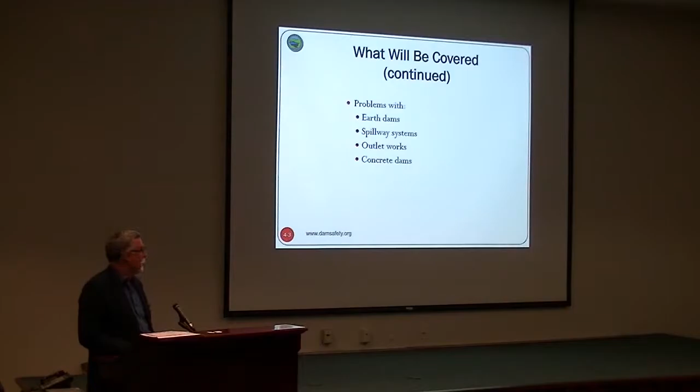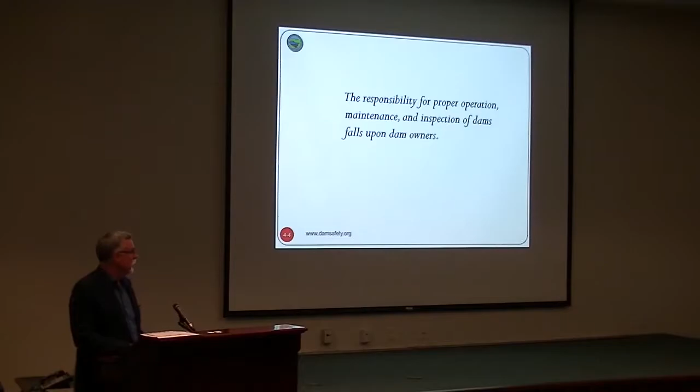Cannot overemphasize whose responsibility it is - you as a dam owner. There's a lot of assistance people can provide, a lot of people can answer your questions, but it's your dam, it's your liability and responsibility. Keep that in mind, because if the dam were to fail, you may not ever get it back, so your homes and property values are going to drop. It's important to try to keep a good, safe operating dam at all times.

O&M is just like taking care of your house. If you don't repair a leaky roof, it's going to do more damage, and the dam is no different. If there's a problem with it, nip it in the bud, try to correct it as soon as you can - whether it's just repainting something or having to come out and fix some small concrete repair. Even though they appear to be very minor, they will get more expensive with time if you don't address them.

Let's talk about dam operation itself, specifically record keeping. If you have instruments and toe drain outlets, if you measure a depth, you want to record what your lake level was that day. If there's been heavy rain, indicate that too - say it rained 3 inches over the last 3 days. Measure your toe drains, and if there's more than one, label them and record the flow rate. All you have to do is take a stopwatch and a graduated bucket. Usually these drains will be small gallons-per-minute flows. A lot of the time we measure them twice and take an average, then record them and keep a log to track all the readings.

Your emergency action plan, once developed, is a living document because people's names and phone numbers change. So at least every year, make sure the contact information is current, and if it's not, update it. When you update it, make sure you send the new information - Joe will touch on that - to everybody who has a copy of the plan. It doesn't do any good if you're the only one with the correct phone numbers and nobody else has it.

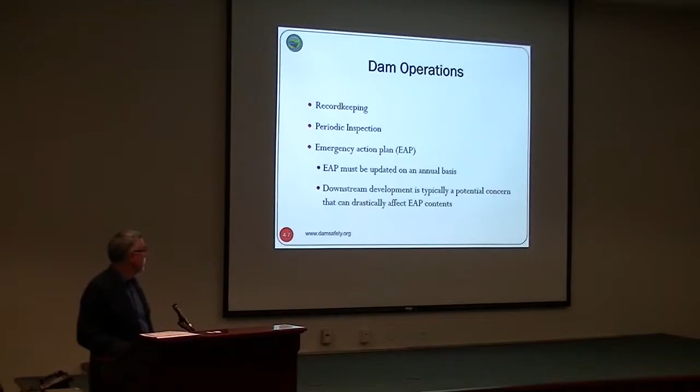Public safety, as I mentioned before, lakes are an attractive nuisance. At spillways, you want to put signs, gates, locks, or try to limit kids coming out there and playing at your structure. Eventually, somebody will slip and fall and you'll get sued over it.

Joe talked about the legal aspects - if you don't have signs or gates, the lawyer's going to say you invited the kids to come here, that you didn't do your due diligence to minimize them being attracted to your lake and spillway.

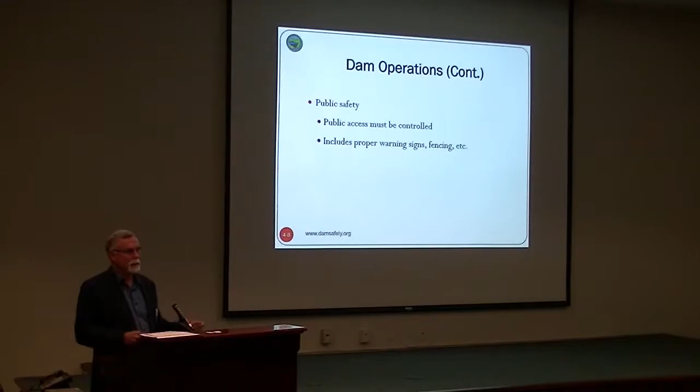So here's just simple signs. Sometimes with bigger lakes, they'll have warning systems below the dam. These big hydropower facilities, when they generate power, release a lot more water, and there may be fishermen or people kayaking. A lot of these big power companies have audible alarms that sound off before they start releasing water.

So it's really the big boys that have to mainly worry about downstream. But you do sometimes want a simple sign - keep off, danger, something like that - particularly near the spillway, to make sure people aren't playing around it.

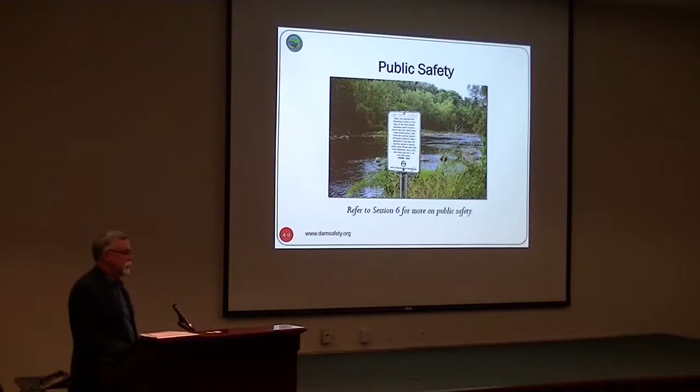Operation of drains and siphons. As I mentioned before, if you have a gate, you don't have to open it all the way up and close it - you generally just want to crack it to make sure it's not frozen. Because sometimes if you open the gate, you can't close it, and you end up draining your lake and killing all the fish. But you want to make sure it's not frozen.

If you have a siphon, periodically start it manually to make sure it's still working. They're designed such that you can bring a small pump out, charge the siphon up, and get it to run. Let it run for a minute, shut it back off, and everything's good.

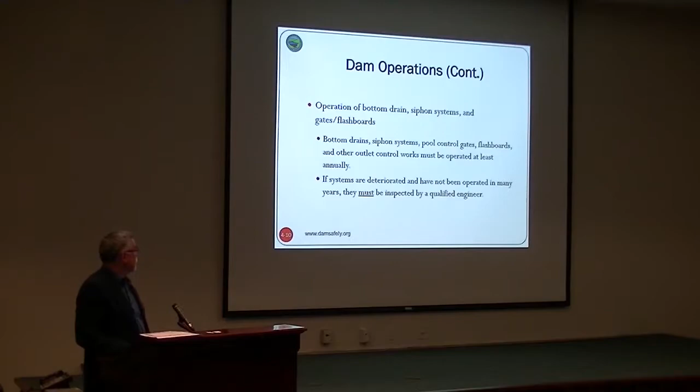If you find a siphon, drain, or gate in such bad shape, you need to get an engineer to evaluate it and get it repaired. If you've got a spillway gate that doesn't work, and then you have a flood and try to open it and it doesn't work, that's going to be a legal responsibility. The facts will come out - if you had a gate that didn't work, it could have maybe prevented your dam from failing, but it did fail and it killed somebody. As Jill mentioned, between maintenance and repair, a gate probably falls under repair if it's a big enough gate. Just keep that in mind.

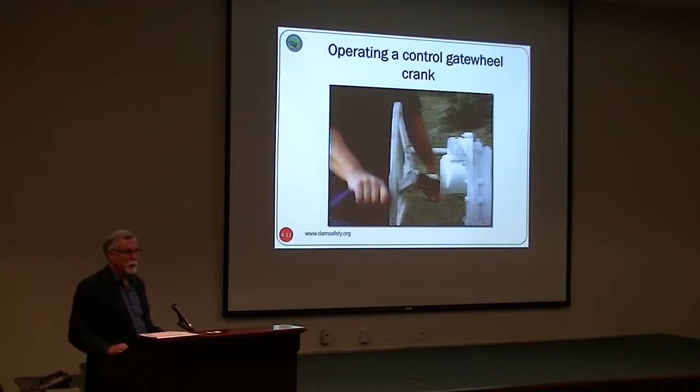As I mentioned before, the gears on these are such that it doesn't take much to open up the gate or close it, and you can easily open the gate, but you damage the gate by trying to close it.

During a big storm event, when your lake goes up 3 or 4 feet, you want to look at the dam immediately after the storm, because there may be a crack in the dam that's above your normal water level that never sees water. Now your lake went up 3 or 4 feet, and water is going through a crack you never knew existed. So always after an elevated pool level, come out and check your dam.

Not just the top of it, you've got to walk downstream also. Immediately remove any floating debris, because eventually those principal spillways create a current, and all that debris is going to be attracted to your spillway. If you've got a good looking functional trash rack, that's great, but the trouble is all that trash is going to build up around it, so you've got to keep that unit cleared off.

Instrumentation systems - I've seen where people are out mowing the grass and they just run over an instrument, they don't know it's there because there's not a marker. So if you have a monitoring well or observation well, put a marker next to it so the guy, particularly if you hire out the mowing, doesn't run over it and knock off the top of the instrument.

Some dams, not many, where there's a hazard immediately below the dam, I've had people install an audible alarm where if the water in their lake or spillway reached a certain level, a siren would go on, because the house was right there below the dam, the hazard. So if you have something like that, and they are useful at times, make sure it works - you've got to test it.

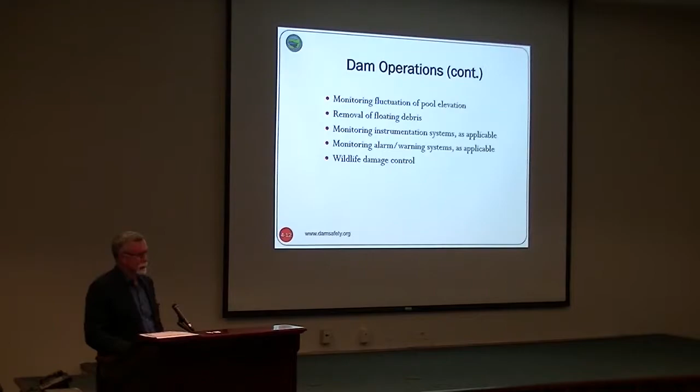Joe mentioned vegetation, particularly along the water line. Those animals like that cover and protection, so if you remove it and keep it cut, those animals don't like that - they'll generally stay away. But if you let it grow up in bushes and tall grasses, they love that habitat.

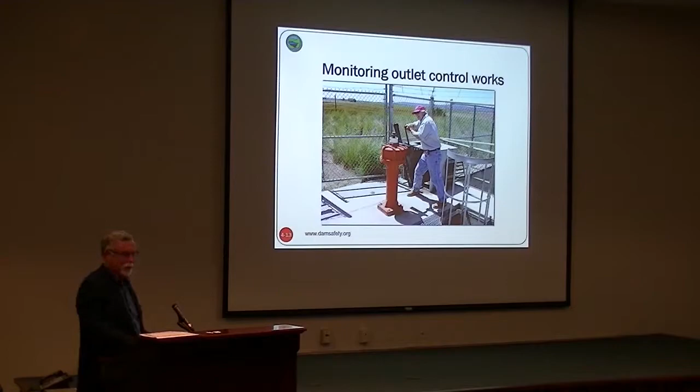It's kind of like in your house, you say I'm going to put something over here so I don't forget, but then you forget where you put it. Don't leave it on there, because even though in this case you've got fences and all, kids will come in there once they figure out what it is and start draining your lake for you.

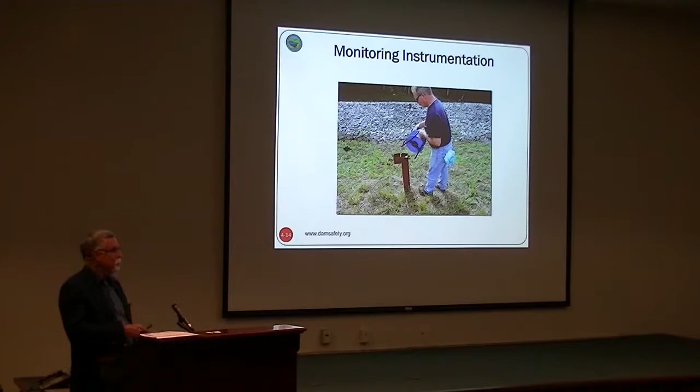Next thing you know, your instrument doesn't work, and it's $5,000 to replace it. So put a cap on it. And in this case, make sure it's not at ground level, because you don't want rainwater giving you a false elevated reading. So you have it above the ground, and you have it locked and secured.

Dam maintenance depends on the type of the dam, but we're going to mainly talk about earthfill dams. The watershed characteristics - mainly if you're on a large watershed during floods, expect a lot of debris coming down into your lake during the flood event. If you're on a small one, not so much.

Spillway systems - we're going to talk mainly about the concrete spillways. New concrete may last 100 years. If the concrete was placed 30, 40 years ago, they did not have air entrainment during that time, and old concrete was subject to freeze-thaw damage, which will eventually, over time, actually destroy the entire concrete.

The best thing you can do is not have any trees on your dam, but once you get a grass cover, keep it mowed. Not once a week like your front lawn—maybe only 3, 4, or 5 times a year. But you don't want it 18 inches high where you walk out there and can't see cracks, can't see seepage, and it's just more attractive for burrowing animals.

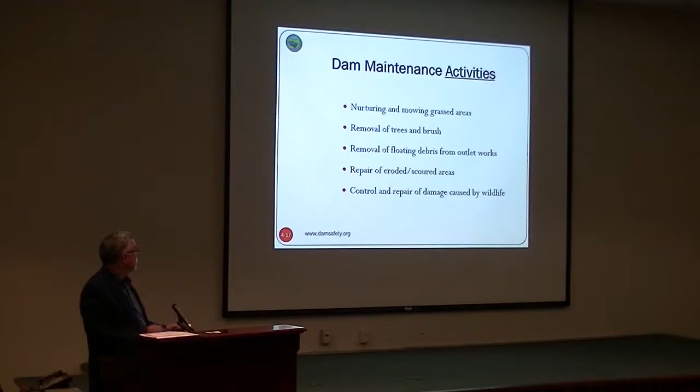Small trees, say under 4 inches in diameter, I cut them flush with the ground. Don't worry about those roots. Anything brush and small trees, just go out this weekend and cut them flush with the ground. Anything bigger than that, with bigger root balls, you need to take those up, and that gets into a repair where you need to go through the permitting process.

If you've got an emergency spillway, or if your dam were to overtop and create a gully, immediately get those filled in and get grass reestablished. If you leave it, and you get another flood event, it's going to get attracted to that gully and get a lot bigger and a lot faster. Same with burrowing animals—trap them and then fill in the burrowing holes.

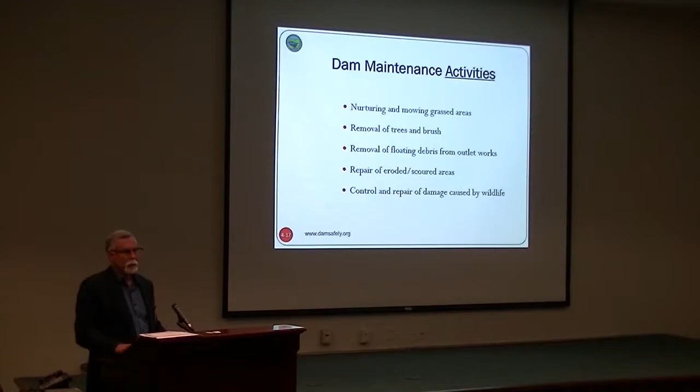Again, the grass—you can't beat a well-maintained dam. Not only that, the main thing is it helps you with inspection, to be able to spot the problem early on.

I had a gentleman during the lunch break ask, what if we're removing big trees? If the dam is, say, 15, 20 feet high and it's covered with big trees, by the time you take the trees and stumps off, you're going to rebuild the dam—I mean, you're going to take it down. Now if the dam's 25, 30 feet high, yeah, you've got to bring in a lot of dirt, but you're not really starting from scratch.

But eventually those big trees will blow over and the roots will die. For these smaller dams, I guess the urgency is you should do it now, but you've got to keep in mind, you're going to be rebuilding your entire dam by the time you get most of the roots off.

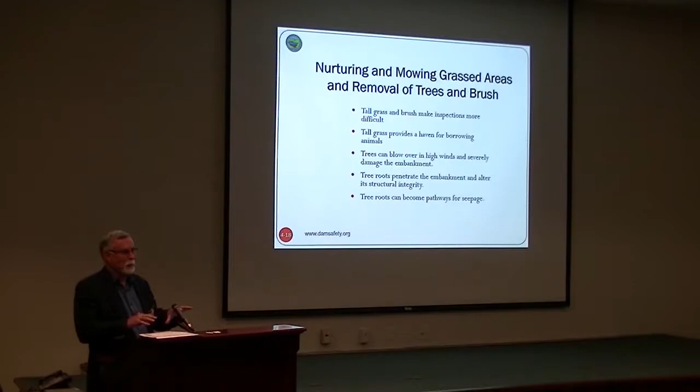Now, when you take out a stump, we're not telling you to trace every single root out, because those roots may go 30 feet in each direction. You get the main root ball, the major roots, and then put compacted earth back in the hole. Yes, over time those small roots will rot out, but that's generally not been found to be a problem. It's the bigger ones you want to try to get out and put compacted earth back.

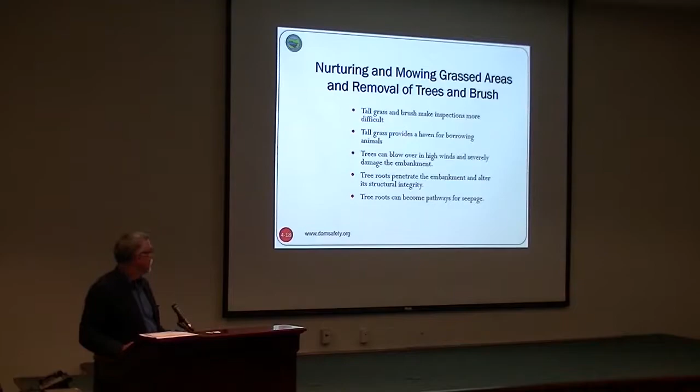Now, obviously mowing on a slope can be difficult. They do make slope mowers—they're not cheap, but they let you mow fairly steep slopes. So this is a good example—that's probably 3 or 4 weeks of grass cover, maybe 5, and that's fine. Then you come out and mow it fairly close.

After you mow it, you as the dam owner should inspect it. It's a good time, when the grass is at its lowest, to go out and walk the entire dam. That means not only walking the crest, but walking back and forth along the slope about every 10 feet vertical, not just at the top and bottom—you want to walk the intermediate part.

Sometimes it's hard to find an animal burrow hole that's only 6 inches in diameter, or a crack in the dam. You've got to walk back and forth. Your feet will hurt because you're walking one leg higher than the other for some long distances, but that's what you've got to do for a thorough inspection.

About all the trees and woody vegetation—you can imagine, along the water line, that's just perfect habitat for animals wanting to burrow in. They burrow in right above the tree and go down and then come back up. So their entrance is below the water level, but their den is obviously above the phreatic surface.

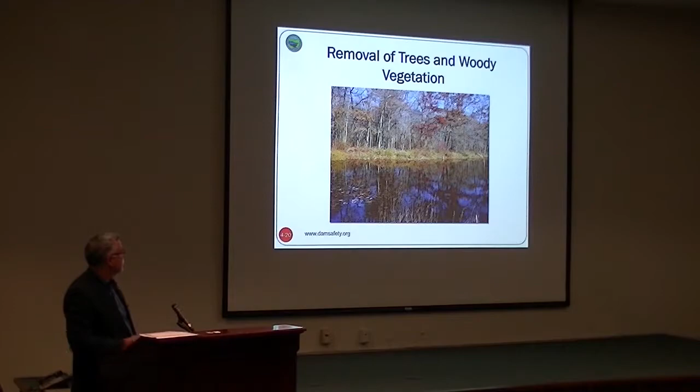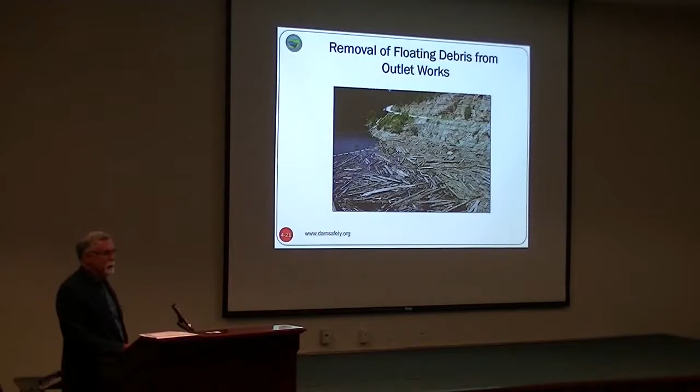Talk about floating debris. A big enough watershed during the storm can really clog up the spillway. Here's the inlet - again, the amount of debris, they just need to come out there, remove it, burn it, all of it off. Don't push it to the side because it'll come right back. Remove it as quick as you can.

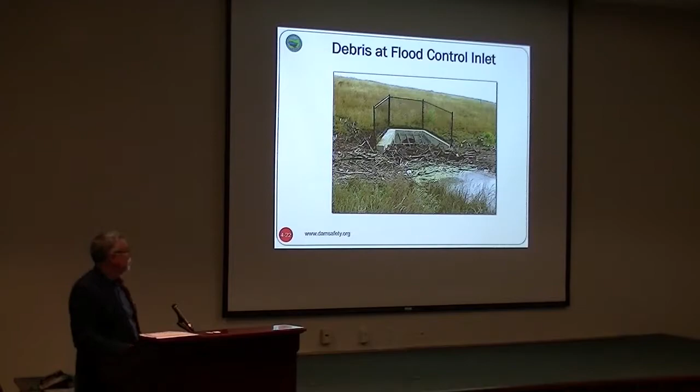If your dam were to overtop, or the grass should die, go back in, treat it, plant grass, fertilize your dam if you need to, because you want that turf to be dense. If your dam overtops and your grass is a dense cover, it'll take a foot of overtopping. But if you get bare areas, those will rapidly erode - that's where your failure will start.

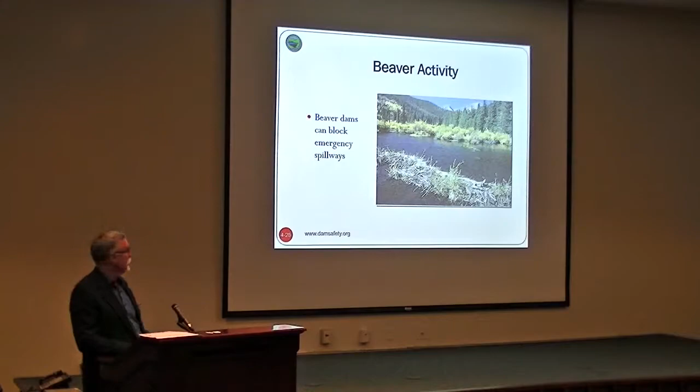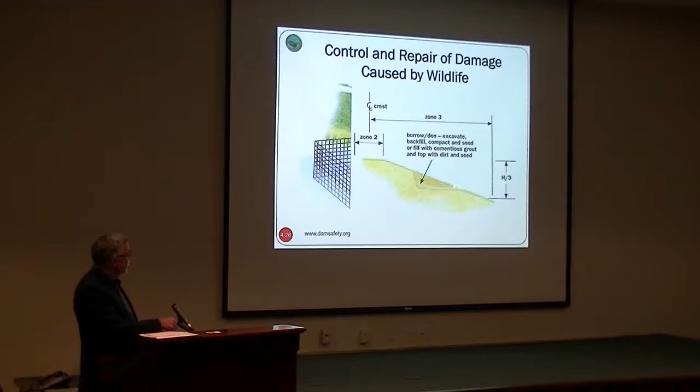Beaver activity will block your spillway - as Joe said, they don't like moving water, and that's generally around your spillway. Here's one where you build a fence enclosure to keep the beavers out of the spillway entrance. A rule of thumb is if you've got an entrance here, you excavate it, and then you can fill it with cementitious grout or compact earth back. But you need to close off as much as possible - not just the entrance way, you need to get the entire cavity as best you can.

So if you look at trees, if the trees die or they blow over, you've got that issue, you've got the animal burrows, both maybe upstream and downstream. And then when you have that, you're going to maybe have a slope failure, so there's a lot that can go wrong with your dam.

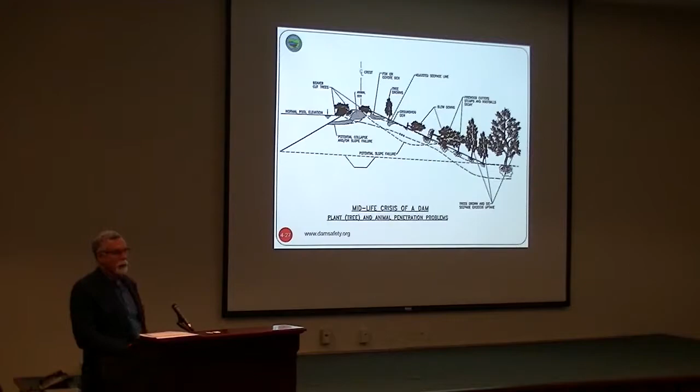95% of the problems occur because you got bad vegetation, you got animals - these are mainly for small dams - animals in your dam, some seepage, and you don't maintain it. That's just a recipe that eventually that dam's going to have a serious problem. And the serious problem generally is either those animal burrows connect and you have a piping failure, or you have a slope failure. So you cannot overemphasize maintaining the dam and inspecting the dam.

Talk about your gates - exercise the gates. Metal components will rust, and if they rust, they'll bind up. So anything that is painted and the paint is peeling off, you need to repaint it.

If you got concrete spillways, most of the new ones have joints in the spillway. The old ones don't, but they're going to crack. A lot of times grass and small bushes will start growing in those cracks, and water gets in the crack, water gets under the spillway. Sometimes minor cracking doesn't hurt a concrete spillway, but if you've got a crack, you don't want water getting under it. So clean out the grass, clean out the roots, and then you can get sealants - like caulking you do around a window - and caulk those cracks so water doesn't get in.

Now there is a point where if you've got a number of cracks and the cracks are rather large, then you have a structural problem. We showed earlier these spillway slabs will crack and can actually come apart during a flood event. But the big thing is these minor ones - keep the vegetation out and keep them sealed with the caulking. You can go to a concrete supply store and get the right material to caulk a crack in the concrete. But like a lot of repairs, 90% of it is prepping the surface and then putting the caulk. If you put the caulk on an unprepared surface, that caulk will come out within a year.

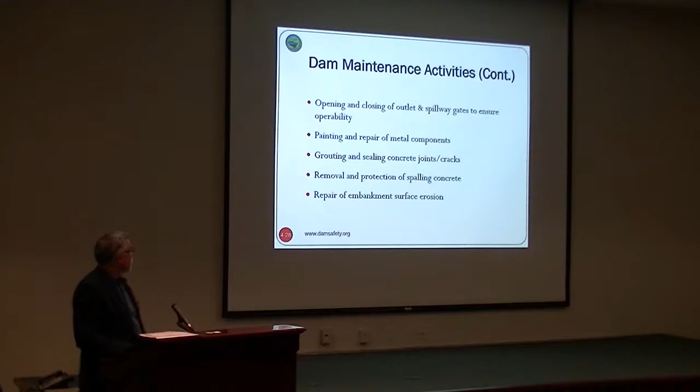And then repair - we talk about erosion. As soon as you start having a gully, fix it as soon as you recognize the gully is there.

We talk about drains. Usually these drain gates are fairly robust, cast iron or steel, but it's metal on metal, so if both of them rust, they may bind and rust together. So exercise them just that little bit to break that rusty seal at least once a year.

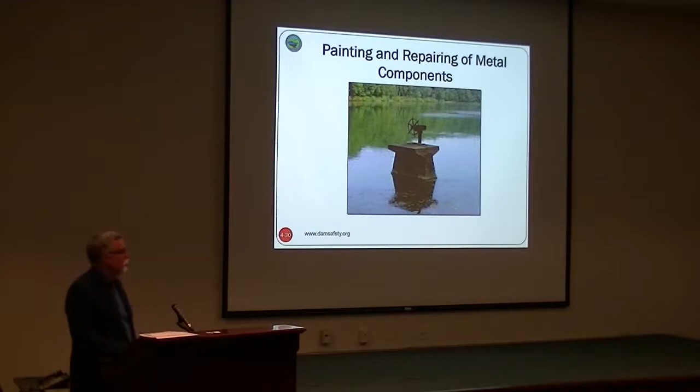These metal components, this operator, some of them you have to lubricate and do that periodically. And if it's rusty, you use a wire brush or similar tool to clean off the rust and paint it, just like any metal thing. Otherwise, if you don't, it will slowly deteriorate and you'll have to buy a new gate operator.

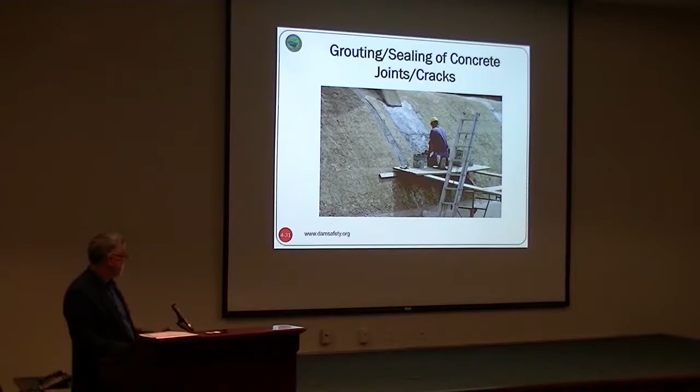The spillway where they need a little work, you see there's some joints and some cracks, and you see the grass growing. And you see there's some caulking where they have tried to caulk those in the past and they did not do a very good job cleaning it out. They kind of mowed the grass and put caulk over the grass.

But you really need to clean out those joints the full depth of the concrete, and then put in your compound. This one has a void. You can put a steel rod at some of these joints and go down like 18 inches, knowing there's a void under this concrete. This spillway is about 40 years old, and now the water's gotten through the cracks and washed out some material.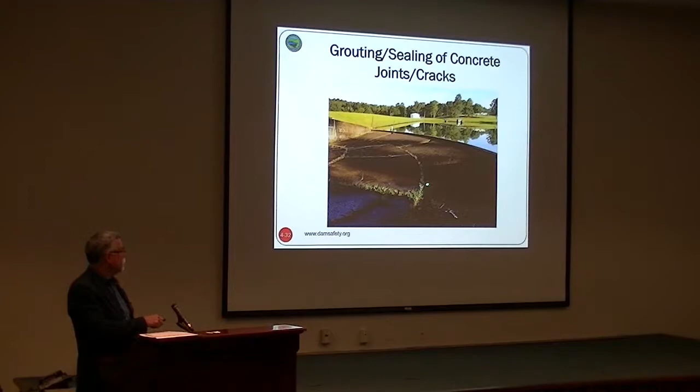This one has spalled concrete. In this case, the reinforcing steel has not been exposed yet. Usually concrete has 2 or 3 inches of what we call cover before you get to the steel. But that's getting bad enough. Eventually that needs to be sandblasted and repaired. It's not long before you're going to start seeing the reinforcing steel, and then the corrosion will start.

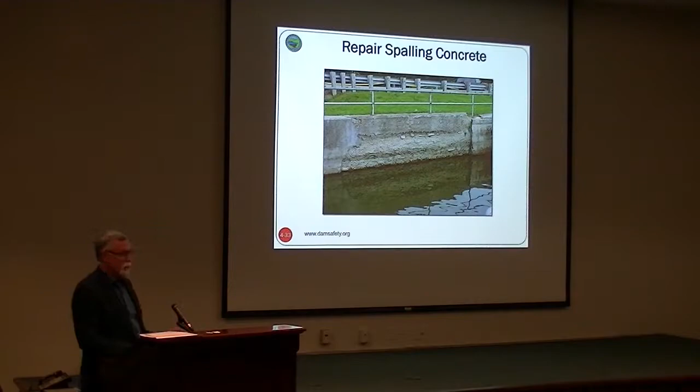Nowadays, on particularly new dams, instead of trying to get a contractor to grass a 3-to-1 slope and then come back when the grass doesn't grow very well, we're specifying sod on the dam slope. You've got immediate grass cover, and you don't have to worry about erosion.

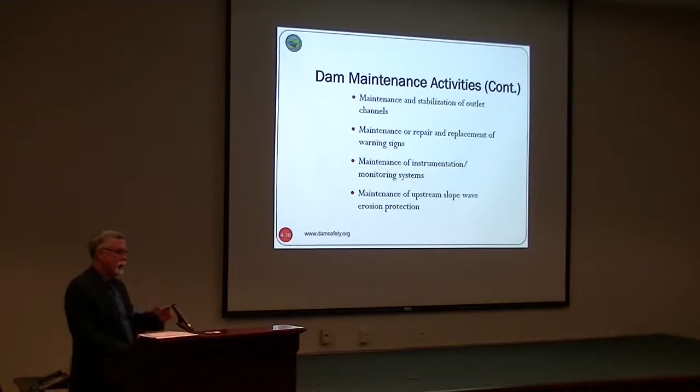So for maintenance of outlet channels, we talk about instrumentation and upstream wave protection. If you have a big enough lake and you get a storm with waves, it does create an erosion problem that you need to repair. For a small lake, you just fill it in, and again you may have to lower the lake a little bit and get grass to regrow, or you bring in riprap along the upstream slope.

So here's an outlet channel. The velocities of the water were too great and created this big erosion gully.

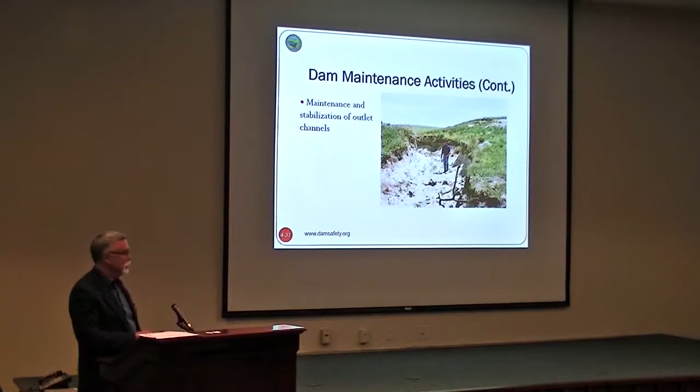Here's one where you do have riprap. This is a large lake. When you get on these large lakes, the waves can be 3 or 4 feet high, so they can do a lot of damage if you've got a large enough lake.

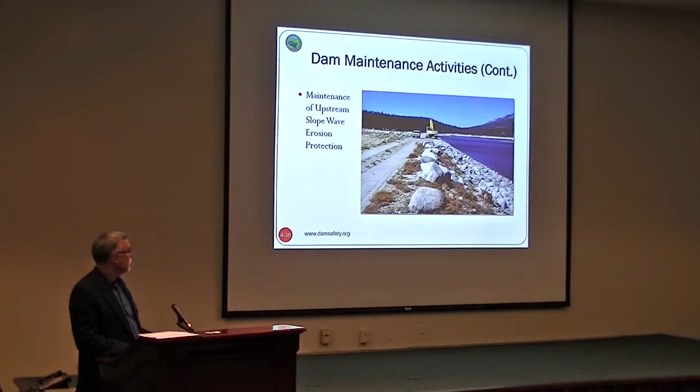If you've got a dead tree, go ahead and remove it, because the roots are dying. The tree will die before the roots, but as soon as you've got a dead tree, you need to go ahead and remove it and have somebody come in and dig up the stump and put in compacted fill where the stump used to be.

Sediment at inlets: if you've got a lot of sediment coming in, particularly near a spillway, sometimes that sediment will start blocking the entrance of the spillway. If that starts to occur, you need to get someone to come out and dredge and remove that sediment.

This is kind of important: if the only way into your dam is across a small bridge over a gully, that's subject to getting washed out during a big storm event, and nobody can get to your dam. So you've got to look at, if I have a big storm event, how can the people I need to save my dam get to my dam? Is there an alternate route, or what do I need to do to guarantee that I can get contractors in the middle of the night to my dam? So you've got to think through access during an emergency situation.

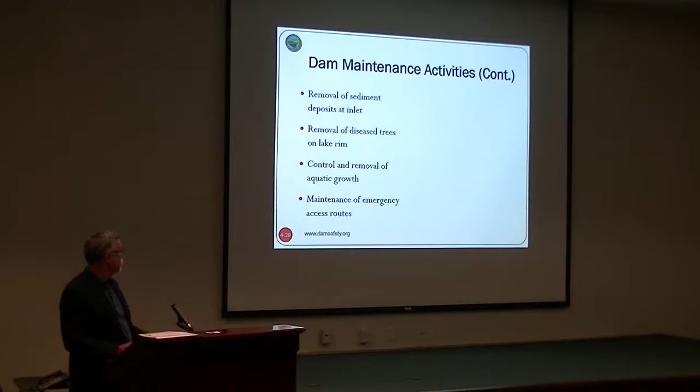Most problems are obvious to the naked eye, not all, but most. You generally know what to look for. Is water coming out of the dam? Even though they all leak and we try to collect the water, if it's coming out of a spot you've never seen before, it could be a problem.

When you have a pipe too small to crawl up in, every few years you need to get it camera inspected to make sure it hasn't collapsed, and if it's corrugated metal, that the metal isn't rusted completely away.

I can't overemphasize this: you can't inspect the inside of these pipes, so the sewer contractor has a camera that will crawl up the pipe. It's not that expensive, and it's really worth the money. If you've got a corrugated metal pipe, every 5 years you should have a camera run up it.

Your inspection will help you make a list. Okay, I need to repair this gate steel, I need to paint this, or I've got some spalling concrete. Make a to-do list: here's what I need to accomplish over the next year.

You obviously read all your instruments and record that data. That's important because what we look for is trends in the data readings. An individual reading doesn't tell us a whole lot. We're looking at what's happening over the lifetime of that reading, whether the trend is going up or down. So you've got to have that data, get a piece of graph paper, and plot it. For example, my toe drain number one was 1 gallon a minute, 1 gallon, now it's 5, back to 1.

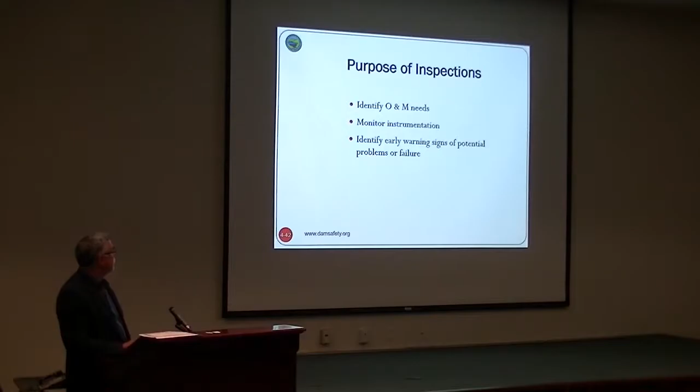Stability of a dam: your slope was built on a 3-to-1, you mow it, it looks very nice. Then you go out and look at it and see a little hump somewhere you didn't see before, or a little depression. That's all in your eyeballs. If the grass is tall you can't see it, but that can tell you there's the start of an instability problem. It'll be a slow movement, and if you catch it early enough, you can save your dam.

We talk about seepage. Look below your dam, look at the abutment contacts in the natural ground. Water is going to find its weakest path, and it may not be through the dam, it may be around the dam.

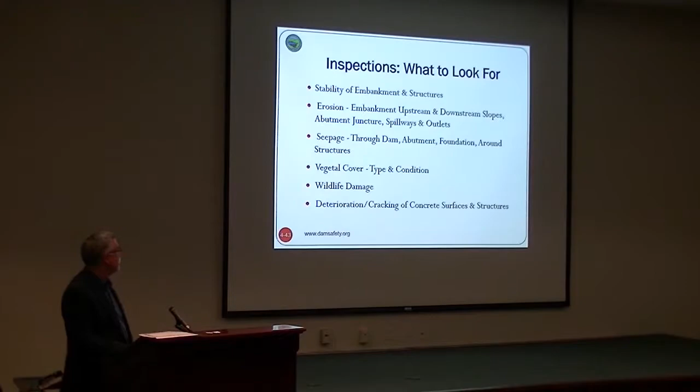So we've got slopes here, this is an earthen dam, slope stability. Do I have wave erosion? How's my seepage doing, do I have it? Should it change?

If you've got woody vegetation, a lot of times if you've got a seep area, the vegetation is going to be different. It's not going to be fescue grass growing, it's going to be vegetation that loves saturated ground. That'll tell you before you step up to your knees in wet mud. You can look at the vegetation, see willows and weeping love grass, and say, alright, I've got a wet area.

At that point, you may have to put in a drain system to relieve that wet area, maybe a minor drain system. But if you've got a wet area, a lot of times it prevents you from doing adequate maintenance of the dam because it's too saturated to mow.

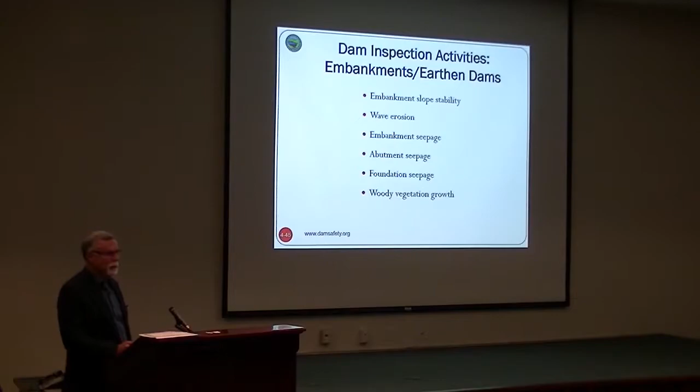This is a shallow one, hard to see, but usually there's a little vertical scarp and a bulge at the toe. It's just a little wedge slide. Once that occurs, the next one's going to be a little higher, and the next one higher than that. When you see that, you need to have your engineer come out and see what's going on.

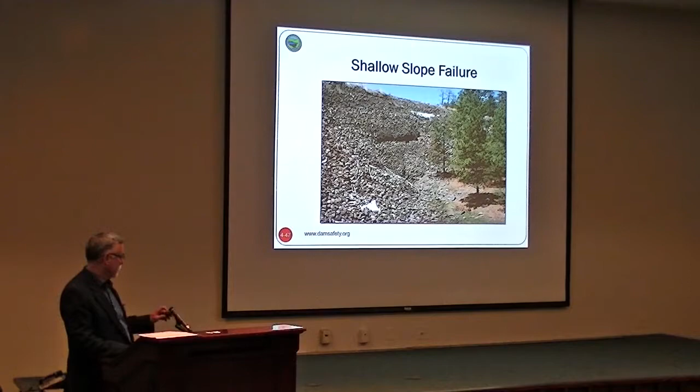If wave erosion is left unchecked, it works its way all the way across the dam, but that usually takes a long time. You can see there's a start - that used to be a slope like this, and now you've got an 18-inch vertical scarp. If it's not repaired, next year it may be back here, and the following year further still. So that's a maintenance activity - catch it early, and you won't end up with a big problem.

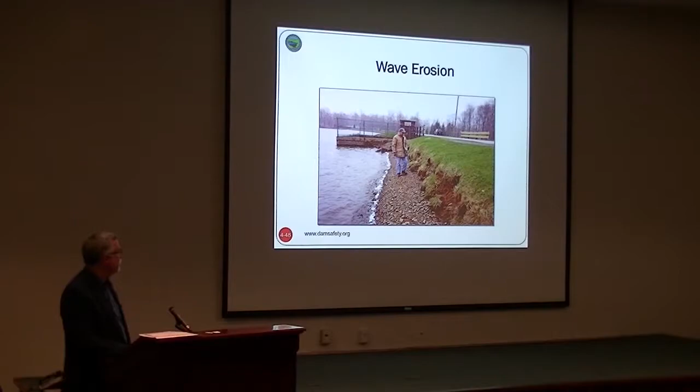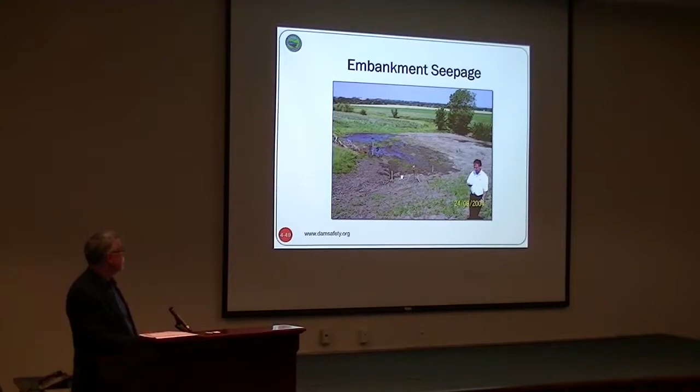I could show you pictures of seepage all day long. Obviously here, coming out at the toe of the dam. Here, water coming out of the abutment. Here's the dam up here, but now the water's coming around the abutment. So in this case, you may not lose the dam, but you may lose the reservoir - it may end up with water draining out the abutment contact.

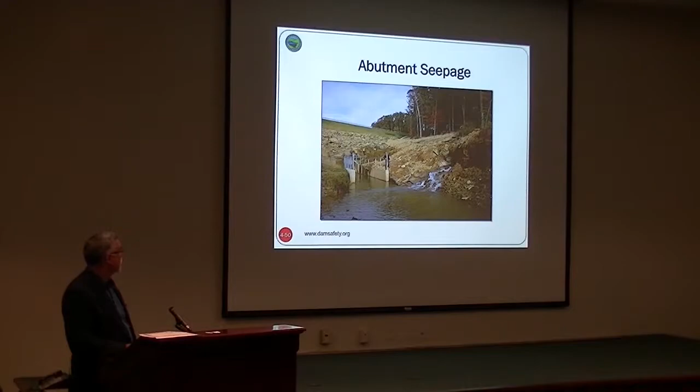So, inspecting for wildlife damage and sinkholes - a lot of times if you've got a metal pipe through the dam, what I do is walk upstream to downstream, because if that pipe is deteriorated, you may find a small sinkhole above the pipe. Pay special attention walking the dam where that pipe goes under, because sometimes a small sinkhole will develop, giving you an early warning sign there's a problem with the pipe.

Cracking - we don't see it a whole lot, but it's serious if you do see one. If the crack runs parallel to the top of the dam, that's a sign of instability, that the slope's starting to move. If it's transverse, which we don't see a whole lot, that's a serious problem - that's where water can go directly from the lake to the back of the dam.

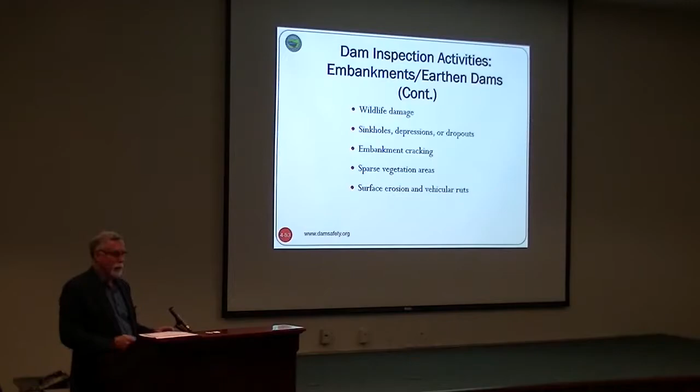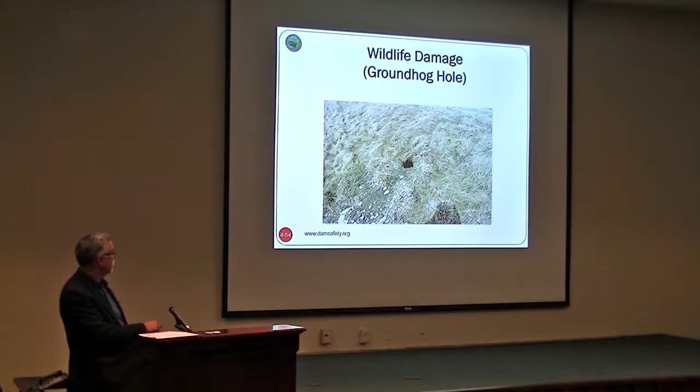Here's a groundhog hole. Like I said, walking the dam, a lot of times if the grass is laying over you won't catch this by stepping on it. A good indication is not so much the hole, but the debris trail, since they push it out. Sometimes it's easier to see this than to see the hole itself.

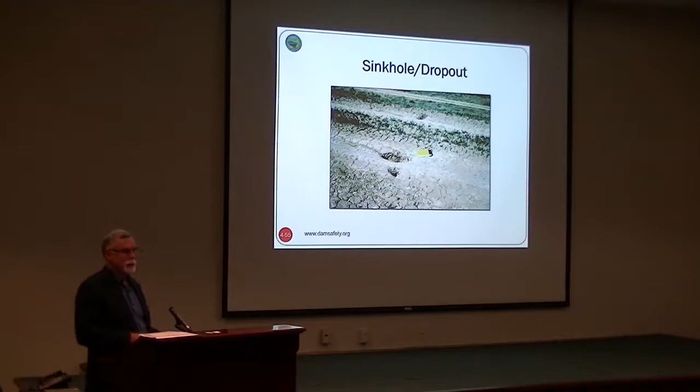Here's a sinkhole - a lot of times you'll find them over the top of pipes, particularly corrugated metal pipes that aren't watertight. So, cracking, sparse vegetation - we're talking about the vehicle rut - they can, if you have a lot of rain, fill up with water and really saturate the top of the dam.

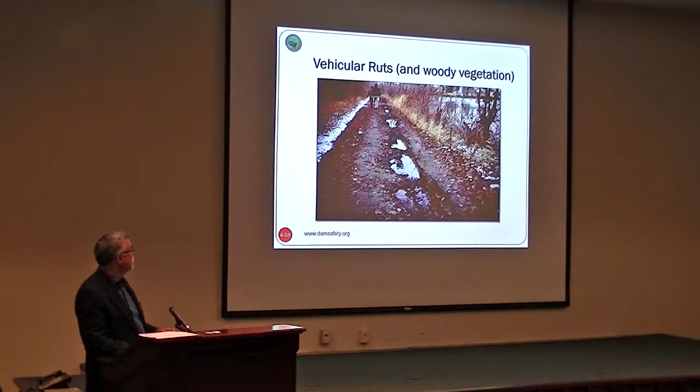So on spillways - we showed you before - earthen spillways are designed to be damaged during your design storm. You get a big enough storm, they're there to prevent your dam from failing, but the spillway itself will suffer damage.

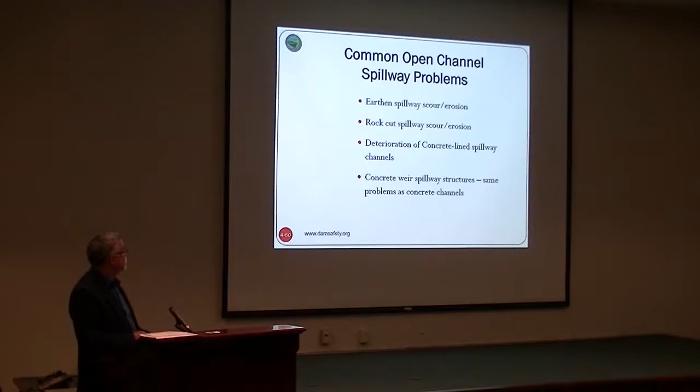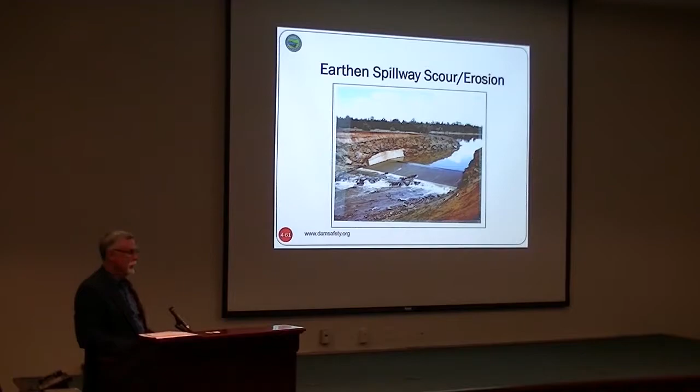So here's one that has a concrete weir, but it's in a rock channel. If you're fortunate enough to have rock, that is very forgiving in most cases.

But here's one you see with rock. It's highly weathered, highly jointed rock. Now the spillway channel, which used to be up here, is now about 8 feet down, and it's starting to undermine the spillway. So while rock looks good and hard, in this case you see how fractured it is, how weathered it is. A big enough storm actually removes a good bit of the rock.

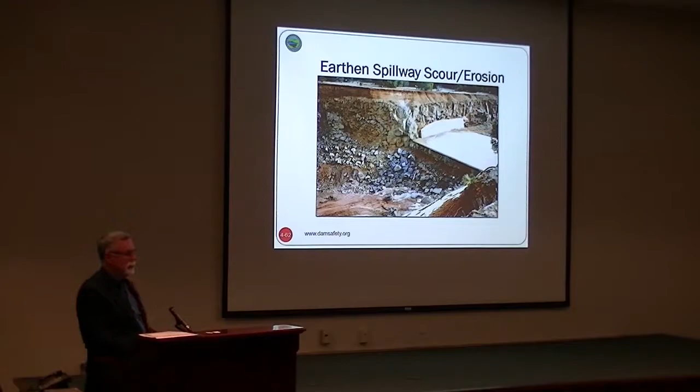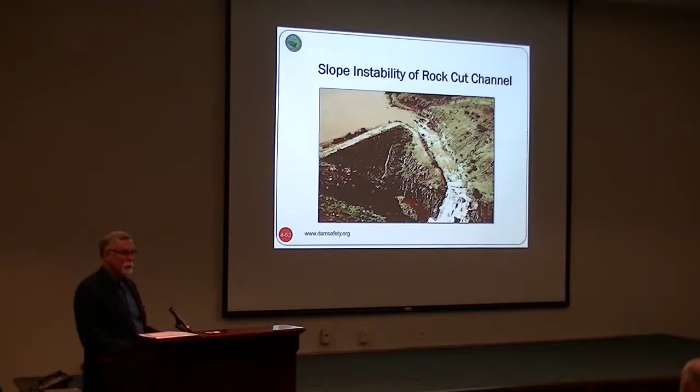Here's another rock spillway. With a big enough flood, you will get the loose rock and the jointed rock removed.

In another presentation, it was in the news at Oroville Dam in California, the tallest dam in the U.S. The dam was fine, but the spillway operated and washed out hundreds of thousands of yards of earth and rock. There's a picture in one of these presentations. But that spillway, even though it was one of the biggest dams in the U.S., was inspected by a lot of different engineers. Nobody went back and looked at the original design drawings that showed that the joints in those spillways, the underdrain, was totally insufficient. If somebody would have looked at that, they would have said, 'Whoa, we need to do something.' But all the high-quality engineers and engineering firms, nobody picked up on that. Ended up spending over $1 billion so far repairing it.

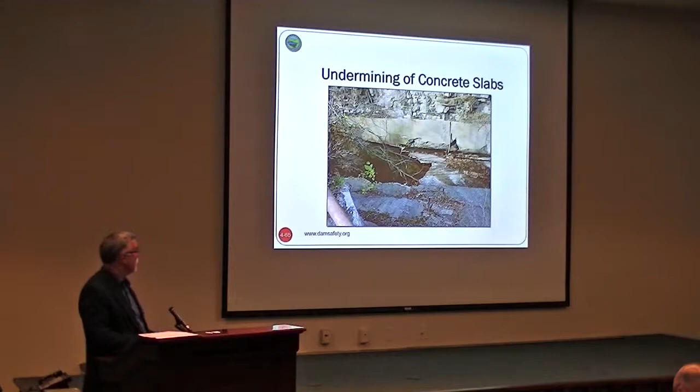So your slabs, if they're not adequate with water stops and reinforcing steel, they'll pop out. Here's the concrete, looks like it's only about 3 inches thick. Most of the time it's 12 to 18 inches thick. It's supposed to be.

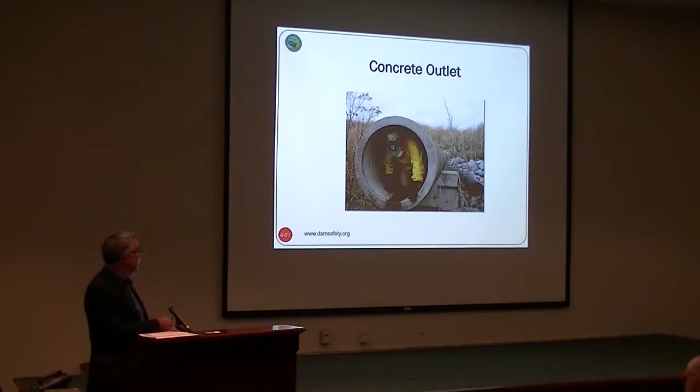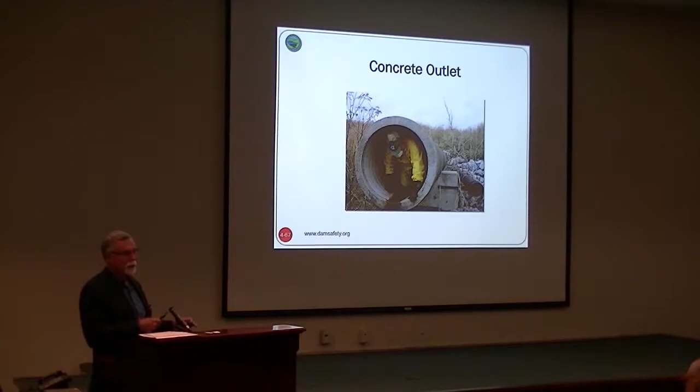Conduits, a lot of different issues with the pipes through the dam, seepage, differential settlement. Talk about some of those. If you're big enough, you can crawl in, but there's a safety thing. That's a confined space, and you should have an air meter and make sure before you start going down into a vault or into a pipe, because you can get into trouble with bad air. But if you do the right procedures, this is better than a camera, because you're crawling up in the pipe, looking at every joint, every pipe condition.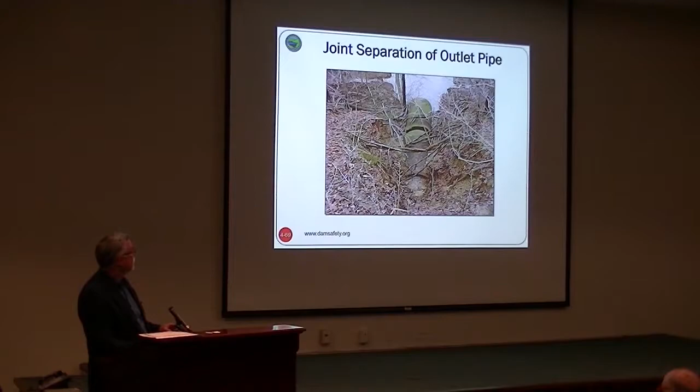So you get in the pipe and look at each joint. This goes back to record keeping. You label the joint, 1 through 15, and then you measure: all right, that joint opening is a quarter of an inch. Five years later, it's a half inch. Next year it's three-quarters. If it's doing that, that trend says I've got something happening causing my pipe to separate.

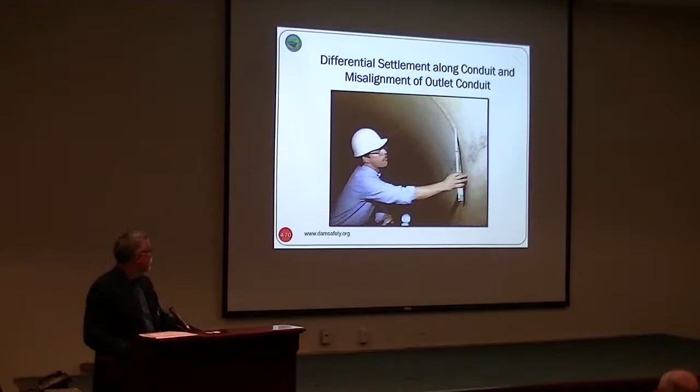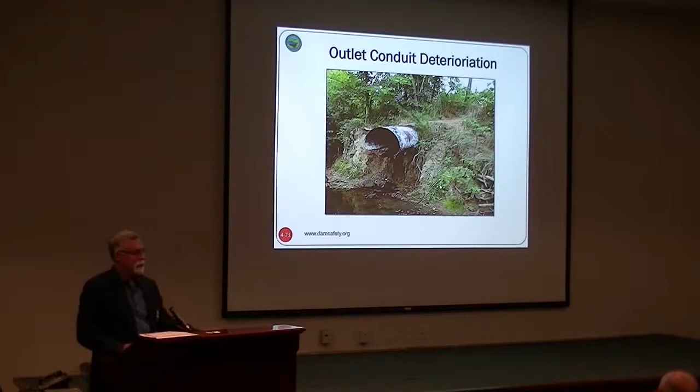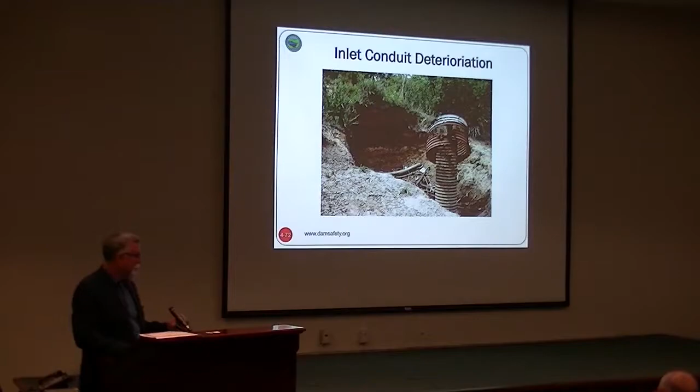Concrete structures, a little bit about that, particularly spillways.

Here's a concrete chute spillway that's got some bad problems. It may not have any reinforcement in it, and I don't see any joints. Usually when you do a concrete spillway, it's kind of like a sidewalk—you see joints periodically. But if you don't put in joints, concrete's going to crack. It expands when it heats up, contracts when it gets cold. If you don't have a joint, it's going to crack. And if you don't have reinforcing steel and water stop, you get these holes and start getting water underneath.

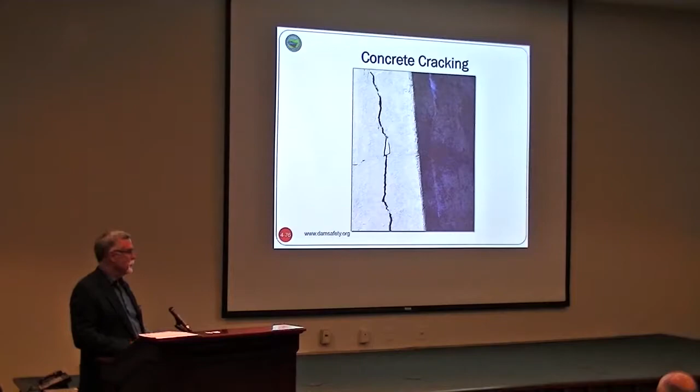Someone who works for the Portland Cement Association told me, if you got a concrete structure and it doesn't crack, call me, because it's going to crack. You put a lot of joints and you see them in sidewalks—sometimes they're cracked right next to a joint. You do your best job putting in joints and all, but generally you're still going to get cracks. Generally they're not structural in nature, they're just a nuisance, but you got to be careful with it.

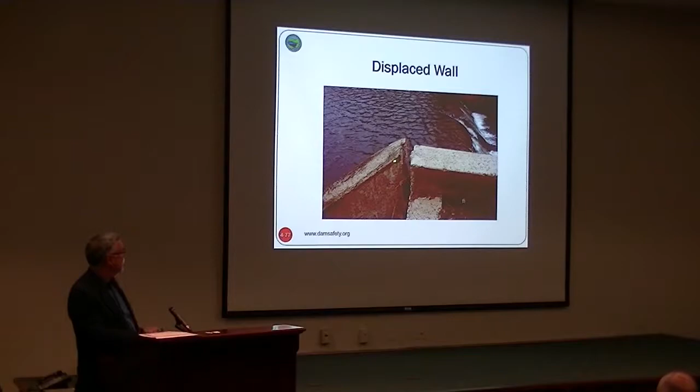Concrete will fall apart, particularly if it doesn't have air entrainment in it. 30 years ago, we didn't have it, so you have freeze-thaw damage. A freeze-thaw cycle is when it gets below freezing, then goes above freezing. In the southeast during the winter, we have a lot of freeze-thaw cycles—it gets cold, below freezing at night, warms up during the day. Up in Michigan, they don't have many freeze-thaw cycles. It gets below freezing and stays there, so one cycle may last over 3 months.

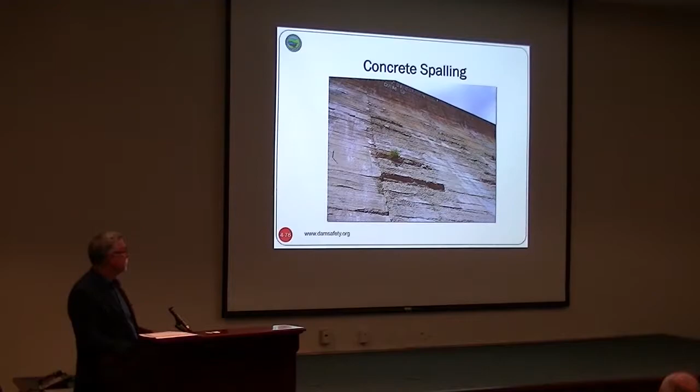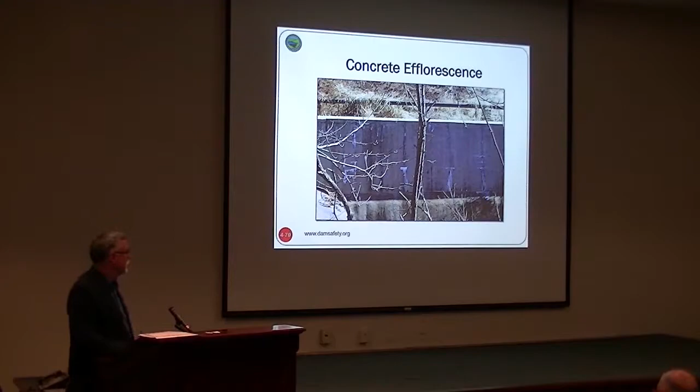Sometimes you see cracks with this white stuff coming out—that's efflorescence. You see it sometimes in brick walls too. That's not a problem. In concrete, the cement contains lime, and sometimes there's an excess amount called free lime. If you get a crack, water coming through causes that lime to come out and become calcium carbonate, a hard white substance. But it's not doing any damage. In fact, sometimes it's a benefit, because if you have a crack with water slowly seeping out, over a year that calcium carbonate will seal the crack and shut the water off. So it's an aesthetic problem, but generally not one to be concerned with.

For concrete dams, we talk about dam leaks. Concrete is not impermeable—it will eventually slowly leak. And even though the leak is very small, again, that's freeze-thaw damage. Because you've got saturated concrete in a freeze-thaw environment, it'll slowly start falling off.

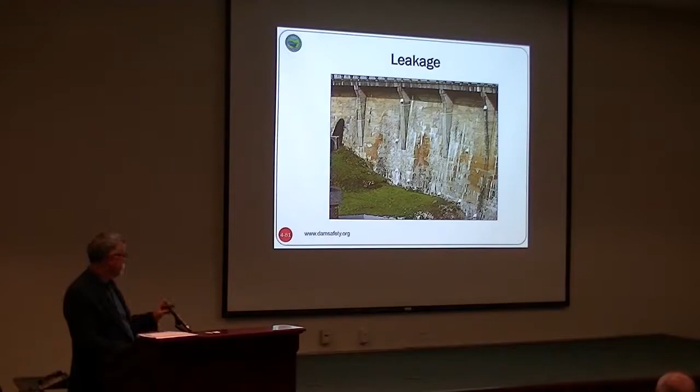Gate leakage generally isn't a problem unless you're losing water and keeping your lake from being full. A small amount of leakage around gates is not an issue.

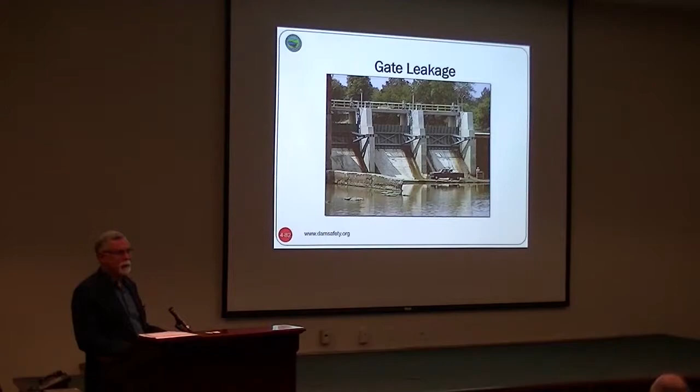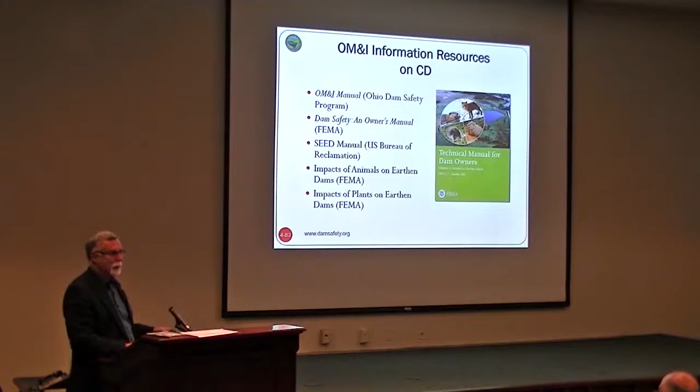On the CD, there are OM&I manuals—FEMA has a dam owner's manual. This CD that I pointed out has a lot of good information about animals, how to trap nuisance animals. Can't overemphasize this—they give sample inspection checklists, because we all have a checklist. What to look for: is it leaking, not leaking, where is it leaking? So be sure to pick one of these up.